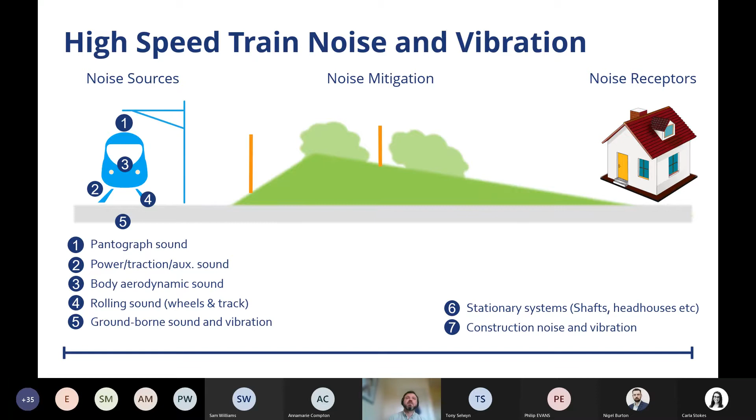So how did we end up with our commitments? Well, really, we need to go back to the noise policy statement for England in 2010. The vision of noise policy is to promote good health and a good quality of life through the effective management of noise within the government policy on sustainable development. And the noise policy has 3 key aims. That's to avoid significant adverse impacts of noise on health and quality of life, mitigate and minimise adverse impacts, and where possible, contribute to an improvement.

And the noise policy statement for England introduces the concept of effect levels, which are used by the WHO in toxicology, but we can also apply those to noise. The effect levels are the no observed effect level, so when noise is below this level, there's no detectable effect on health and quality of life due to the noise. The lowest observed adverse effect level, and when noise reaches this level, effects on health and quality of life can start to be detected. And finally, the significant observed adverse effect level. Above this level, we anticipate significant adverse effects on health and quality of life.

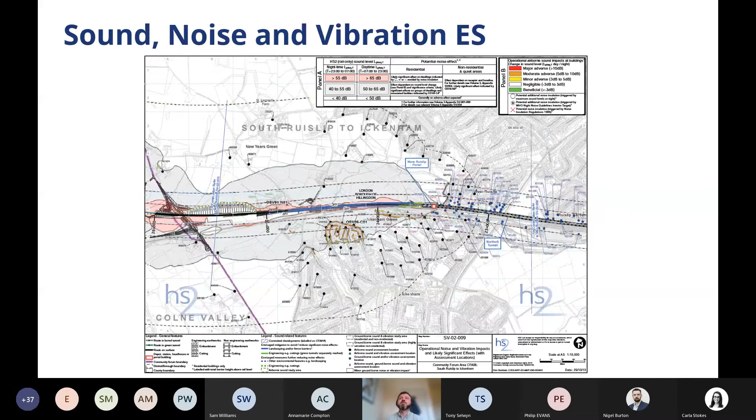So this led to a very particular way of presenting our environmental noise information in the environmental statement for phase 1. This noise map presents information that's compatible with the hierarchy. The grey noise contour on the screen shows the extent of noise exposure above the LOAEL. The red line shows the extent of noise exposure above the SOAEL, and we identify properties that are between these two levels. We identify whether they're impacted with a change of noise. And we also provided noise contours in bands so that a stakeholder could understand the level of exposure in their property.

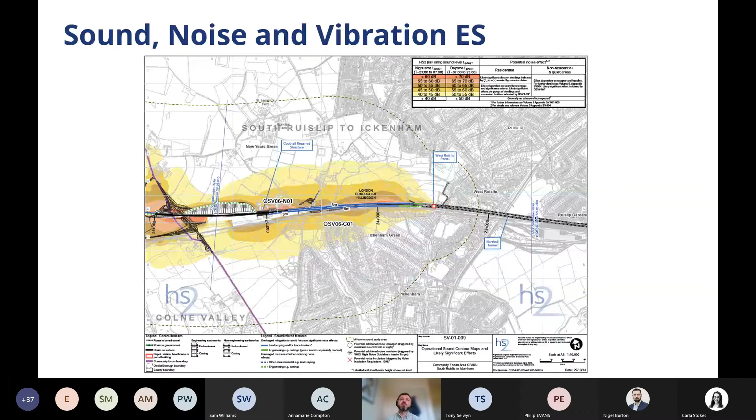So that was the environmental statement, and at hybrid bill stage we also submitted 4 key information papers which set out HS2's commitments, and each information paper refers to the key sources of noise that I've discussed: control of airborne noise, control of groundborne noise and vibration, control of noise from stationary systems, and finally our proposals for monitoring noise once the scheme is operational and the steps we'll take to rectify when noise doesn't meet our expected conditions. I've only got 10 more minutes or so, so I'll only be talking about E20 today, which is the control of airborne noise from the operational railway.

And incidentally, phase 2A of the scheme had a set of almost entirely equivalent information papers, and it's the intent to submit similar papers for phase 2B as well. So I won't go through the papers in detail. I'll just go through a total of about 7 paragraphs. I think the key ones are the objectives of information paper E20.

And so the first one is that the nominated undertaker, that's HS2, will take all reasonable steps to design and construct altered roads and to design, construct, operate and maintain the operational railway so that the combined airborne noise from these sources predicted in all reasonably foreseeable circumstances does not exceed the lowest observed adverse effect level. And that's the second aim of the noise policy statement for England.

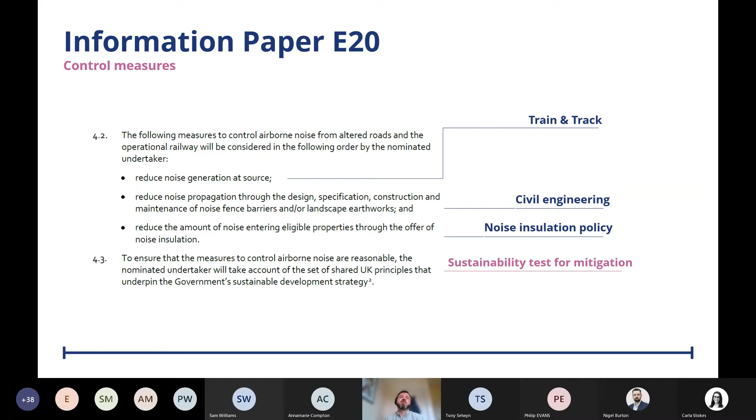And to ensure that the measures that control airborne noise are reasonable, we need to take account of the set of shared UK principles that underpin the government sustainability strategy. So that's really saying there has to be a sustainability test for mitigation. Most of the time we can always reduce noise further, but we need a way of demonstrating that the amount of noise mitigation we're providing is reasonable and doesn't cause other impacts or engineering issues or visual impacts, but I'll come back to that.

So in terms of responsibility in our control measures, the noise sources relating to the train and the track are to do with the rolling stock and our rail systems, and those are subject of design and specification, possibly the subject of another talk. And the noise mitigation is the responsibility of the civils contractors who are designing and building the railway. So the hybrid bill design for Phase 1 included more than 60 kilometres of noise barriers, in addition to earthworks to reduce noise. And currently our civils contractors are optimising that design in line with the commitments that I've described.

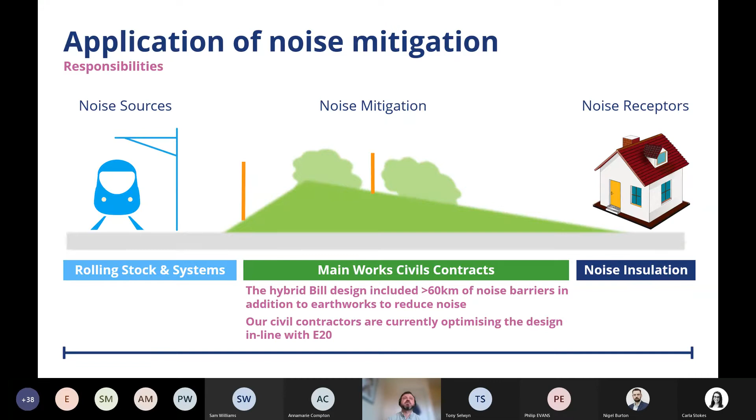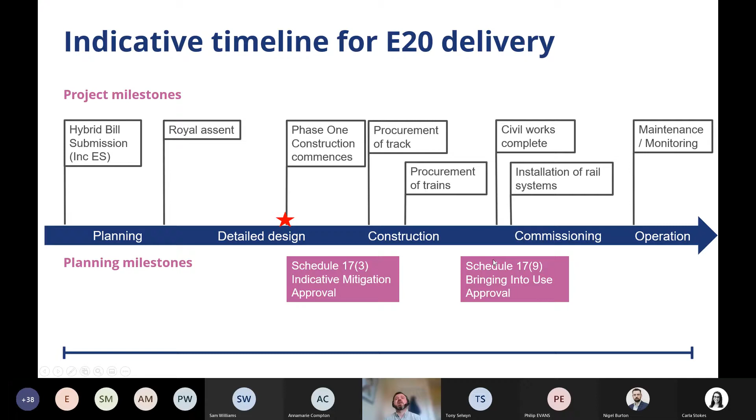Key to today's presentation are some planning milestones, and we refer to that as Schedule 17 of the High Speed 2 Act. And we're currently in this stage here, which I'll talk more about in a second, and we're at the Schedule 17 paragraph 3 approval stage for indicative mitigation. And later on, we have another approval stage called bringing into use.

So I think now is a good time to move on to a case study. What do we actually mean by a Schedule 17.3 application? Well, the HS2 Act for Phase 1 granted us deemed planning permission for Phase 1 of the railway under Part 3 of the Town and Country Planning Act, but some detailed design and construction aspects are subject to further approvals. And Schedule 17 of the Act puts in place a process for the approval of certain matters relating to the design and construction of the railway with the relevant local planning authorities. It's not a planning application because we already have deemed planning permission, but in practical terms, it's treated like that.

So Schedule 17 sets out a number of items subject to approvals, and that's plans and specifications, which are relevant to us. And paragraph 3 talks about indicative mitigation. So that's not just noise mitigation, that can be ecological mitigation and other types of mitigation. And again, we need to provide information at bringing into use. And through the best practice that we've set up through the planning memorandum, which forms part of our commitments, we're committed to providing information on noise at these 2 stages during the Schedule 17 process. And we're required to show that we are reducing noise as far as reasonably practicable at these stages.

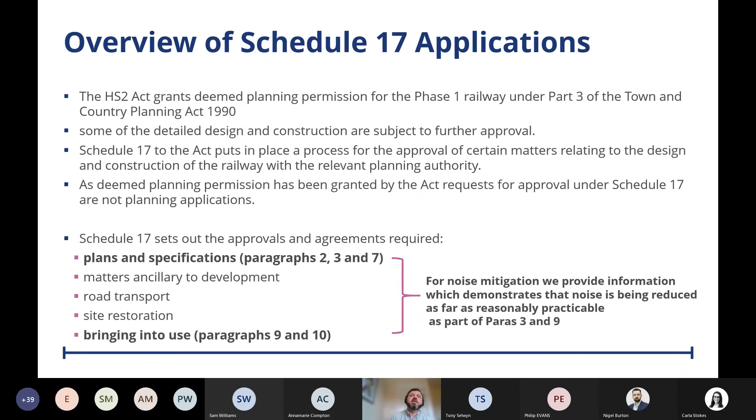So it's actually quite a key stage for us at the moment. Our stakeholders are very interested to know how we're performing. It's been many years now since we've provided updated noise predictions to those presented in the environmental statements. So we're being watched very closely now, and so it's quite an exciting time. The application I want to talk to you about is actually the first approved Schedule 17 application which includes noise mitigation.

So it refers to West Ruislip portal, which is actually hopefully familiar from the first noise map that I showed you. But for the purposes of Schedule 17, the railway is divided into multiple assets, and a Schedule 17 application is made on an asset by asset basis or for a group of assets.

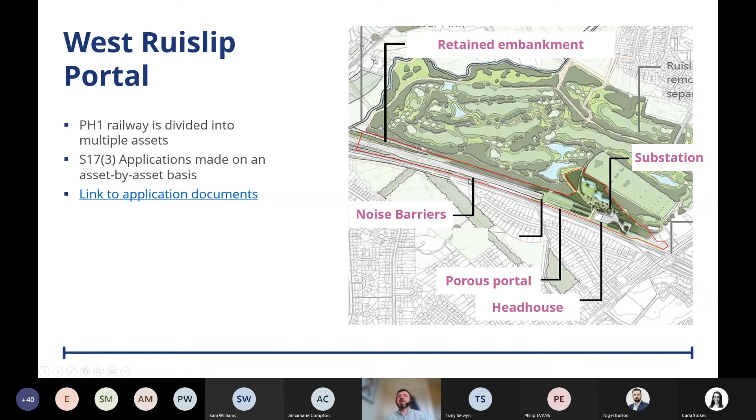And so West Ruislip portal included embankment works, a porous portal on the entrance to the London tunnels, a head house and a substation. But I think most important for today's presentation, it included an application for noise barriers.

So where were we at the end of the hybrid bill? So this picture here just shows you an extract from one of the additional provision environmental statements. So in West Ruislip, we had predicted that 156 dwellings would exceed the lowest observed adverse effect level, and we predicted minor and moderate noise impacts. This is an increase in noise compared to the existing noise level at approximately 70 dwellings.

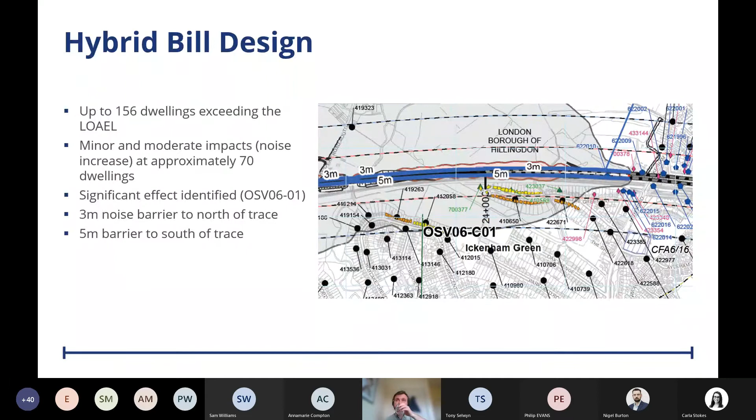And because of this, we'd identified a significant community effect in the community just to the south of the railway. And so the environmental statement included a 3-metre noise barrier to the north of the trace and a 5-metre noise barrier to the south of the trace. And the noise impacts I'm describing there were the residual impacts after the provision of that mitigation.

So in Schedule 17 design, our main works civils contractors have the opportunity to optimise. So they're using noise prediction to test the performance of their designs, and during their Schedule 17 application, they're aiming to demonstrate that the design reduces noise as far as reasonably practicable, using both acoustic and non-acoustic factors. And these were all the parameters that were agreed with the planning forum subgroup, which has representatives from local authorities across the route.

And so these factors are the acoustic performance of the railway, so how much noise is being made, value for money. So this is the comparison of the health and environmental benefits of the noise reduction with the whole life cost of the mitigation. So as you'll see in a second, the government has tools for monetising noise impact, and we need to compare the cost of the mitigation to the reduction in noise impact that mitigation provides.

So operational or engineering practicability. Is it safe to build a tall barrier on top of a tall embankment? Because we can always provide more mitigation, but there'll come a point where it's no longer practicable to do so. Impacts on other environmental disciplines. The key one is the visual impact of a tall noise barrier.

So this slide here just shows a summary of the optioneering that went into the Schedule 17 application. And in this case, the contractor assessed 12 different noise barrier designs and compared the acoustic performance, the visual impact, the value for money, and the engineering practicability, and they came up with their preferred design. So a number of things were tested. This site didn't lend itself to earthworks because it was quite a narrow rail corridor. Earthworks would have needed more land.

So generally this site focused just on noise barriers, but they tested different heights, moving barriers close to the railway, further from the railway, and cranking noise barriers, which I'll talk about in a second.

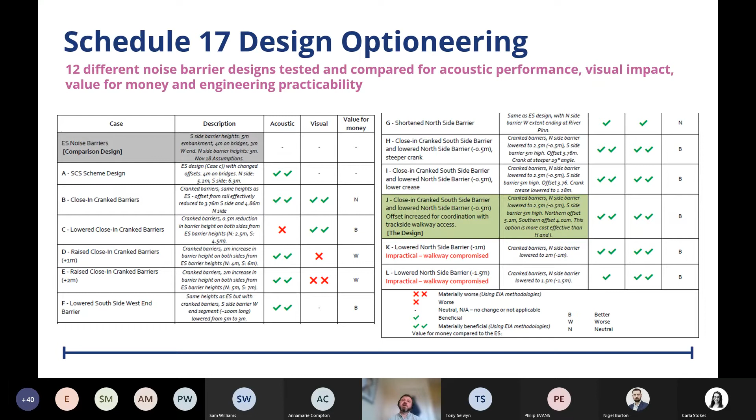And just a little bit on value for money. How do we determine if noise mitigation is value for money? Well, we use the government's transport analysis guidance tool, often referred to as WebTAG, and this provides us a means of monetising the impact of noise based on the most up-to-date dose response relationships for the different outcomes or health impacts of noise.

And so really for every noise mitigation measure, we can come up with a cost benefit ratio which compares the monetised impact of the noise without mitigation with the impact with mitigation, divided by the whole life cost of the mitigation. So a cost benefit ratio of 1 tells us that the inclusion of that mitigation is exactly offsetting the health disbenefits created by the noise.

So at this design, the contractor came up with what they termed a cranked noise barrier design. So this actually helps to improve the acoustic performance of the noise barrier because it moves the top of the barrier close to the railway, and also visual impact was a key concern in this area because this barrier could be seen. So the crank of the barrier helps soften the visual appearance of the barrier.

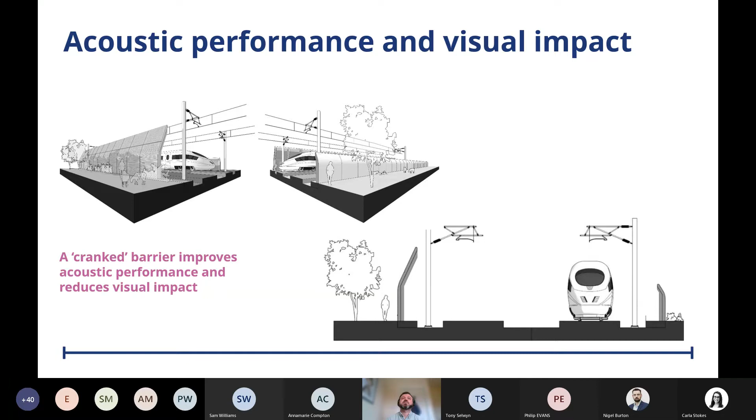And just a plan showing one of the plan drawings and some more sections that are included in the Schedule 17 application.

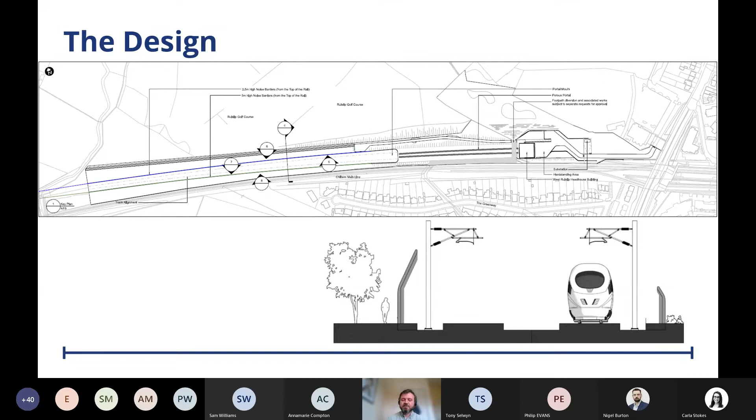And finally, noise information that we provide with each Schedule 17 application. The noise report that we provide does give more detailed noise predictions, but also gives a summary of the overall performance. And so it was concluded that this design actually represented a material improvement compared to the hybrid bill, because if we look at the number of properties exposed to the lowest observed adverse effect level for the proposed design and the environmental statement, we can see both during the day and night the numbers have reduced compared to the design.

And in terms of the impact, so this is the change in noise, we've also reduced the noise change in the communities in the vicinity of the railway. And if we were to go and assess the area again using the environmental assessment methodologies, we would say this is a material improvement in the situation that was presented at hybrid bill. So this is good news. So that's it about the design.

Just one last slide on what's the next steps. Well, as I said, we've only had 1 or 2 Schedule 17 applications submitted and approved. So we're continuing to design the railway and optimize the design to reduce noise. We still need to confirm the performance of the rolling stock and specify, procure and install the track to minimize noise. And eventually we need to implement our strategy for monitoring the acoustic performance of the railway.

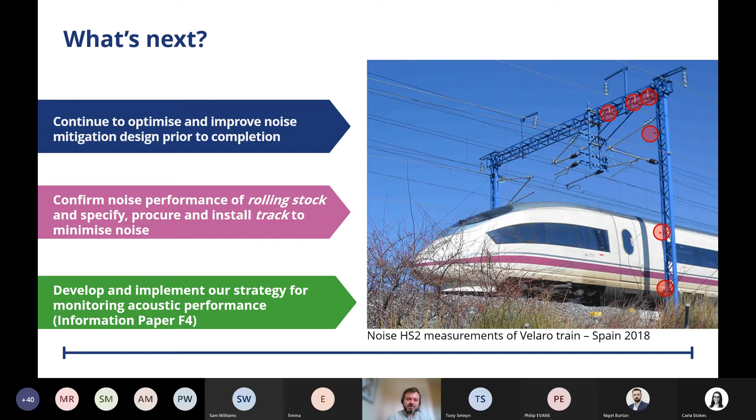While Carla gets the slides back up for the next presentation, which is by Stephanie Murphy and John Fisk. So Steph has been working in ecology for 18 years and has a PhD in bat acoustics. She's been involved on HS2 for 9 years on the design, coordination and survey to inform the hybrid bill, and is the lead technical advisor for the Bernwood monitoring programme and the Natural England named ecologist for the Bernwood bat licence. Steph is experienced in ecological impact assessment for linear infrastructure, specifically road and rail, and experienced in designing mitigation and compensation for protected species with a specialism in Annex 2 bat species.

John has been working in acoustics for around 14 years and has been involved on route appraisal, optioneering, EIA and public consultation for HS2 for the last 10 years. He's experienced in environmental impact and noise modelling and assessment of road and rail traffic noise, mechanical plant noise sources, construction noise, and other industrial noise sources. Steph and John are Executive Director and Associate Director, respectively, at the Temple Group, and will be telling us about the innovative work on how acoustic deterrents can be used to deter bats from infrastructure while ensuring normal levels of bat behaviour in the vicinity remain the same. Over to you, Steph and John.

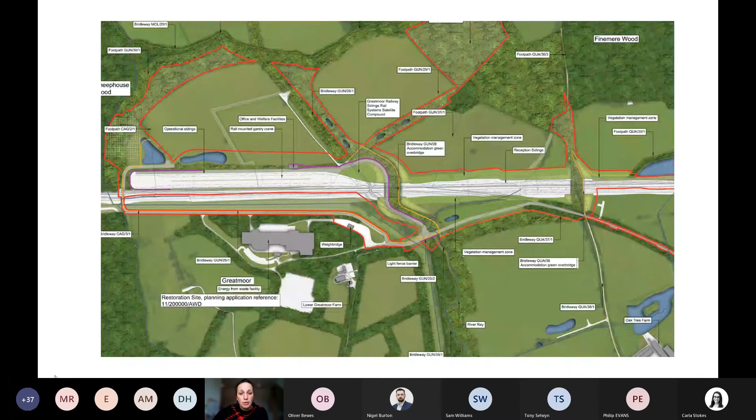Now, a particularly challenging area within the Bernwood licence was the Sheephouse Wood area. So there's the Sheephouse Wood. It's essentially adjacent to the FCC landfill. And this is the sketch of it looking east. So there's a big SSSI woodland, which has got Bechstein's colonies. And our baseline data showed that bats were exiting the woodland to access habitats to the west of the rail corridor.

And the proposal for the restoration of the FCC landfill was to replant this woodland over time. So essentially you will have a big ancient woodland and in 50, 100 years a new woodland adjacent to that. So we would like to think that bats will continue to want to access the land to the west, but if it's bisected by trains running at 360 kilometres an hour, it presents a significant collision risk. The area is very complex, so it's an ancient woodland, a site of special scientific interest. It's an active landfill, and the Network Rail tracks, the challenges are very complex.

So in order to prevent collision risk, a bespoke 850-metre bat mitigation structure alongside Sheephouse Wood is being proposed to protect bats from being struck by passing trains. But there was still an outstanding concern that at each of the entrances to the tunnel portals, at the base of the structure, where bats could enter or exit the structure, they're still at a risk of collision.

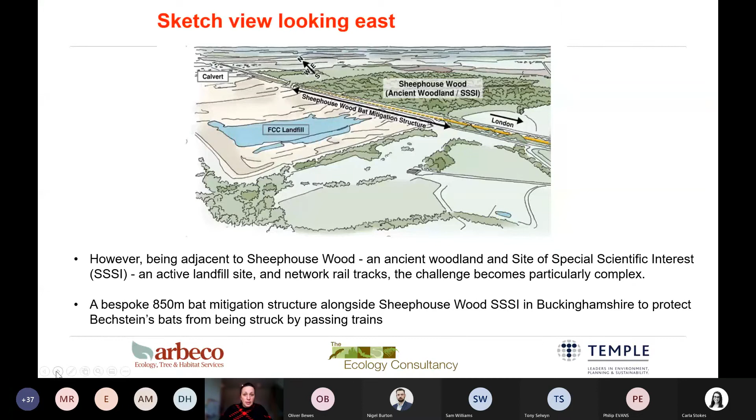But one of the areas that we looked at in particular was the use of acoustics and how we can use acoustic ultrasound to deter bats from crossing the railway at unsafe crossing points. So I'm going to go to the next slide, please. So I'm going to pass over now to John Fisk, who will discuss in detail what is an acoustic deterrent, and then we'll continue on to discuss the propagation and directivity of the deterrents. Thank you.

Hi there. Good morning. Thanks, Steph. So yeah, what is an acoustic deterrent?

So I can hear an echo. Thanks.

Yeah, so bats produce high frequency vocal signals, perceive their surroundings by listening to echoes reflected from targets in their path. I'm sure lots of people are aware of their use of echolocation, things like this. So they rely on that heavily for orientation, prey capture, communication, and obstacle avoidance.

So the acoustic deterrent, as Steph said, is basically an array of transducers or speakers that generate noise over the frequency range of, it says, 10 kilohertz to 100 kilohertz, but basically in the ultrasound frequency range. For those that don't know, the ultrasound frequency range is basically anything higher frequency than a person might be able to hear, so anything higher than about 20 kilohertz or so.

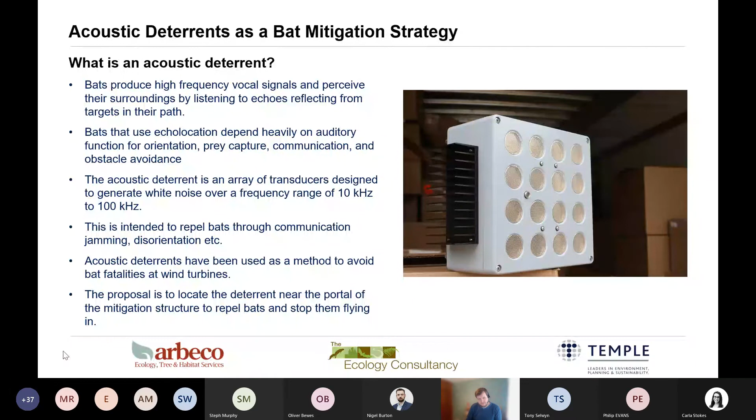Thank you. So there were field tests undertaken. There's basically two main purposes, or two strands of the field tests. I'm going to talk about one of them. The first one, which I won't talk about, which Steph will know more about, is looking at how effective the deterrent is at its main purpose, deterring bats. But what we also looked at is the properties of the deterrent in terms of how it emits the ultrasound and how that propagates over distance and directionally as well.

And the main reason for this is effectively as it says there. So the effectiveness of the ultrasound deterrent is going to be limited by the distance and area the ultrasound can be broadcast into, and things like high humidity, potentially temperature, can affect quite strongly how these very high frequency sounds are actually emitted.

So effectively, if the ultrasound is not emitted particularly strongly, or can't be heard by the bats until they're very close to the unit, then it may affect the effectiveness of the deterrent in general. And it may also mean that you may need an array of units or a different setup to actually deter across a full area of a portal and things.

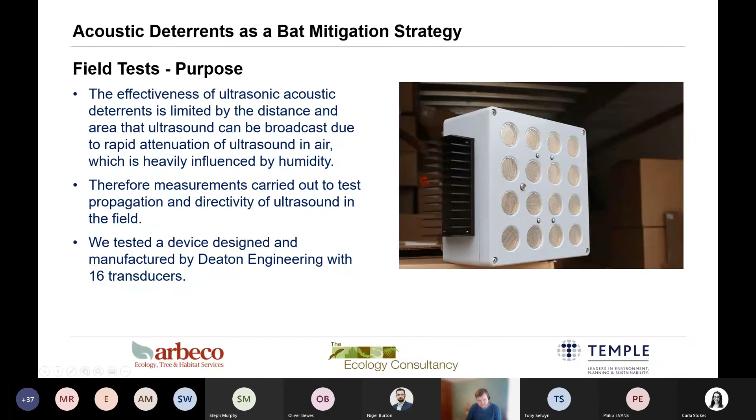And yeah, so we undertook measurements with a sound level meter. It was a slightly specialized sound level meter, not your standard one, with capability of measurements up to around 80 kilohertz. Although when it gets close to that high frequency, the background noise makes some of those measurements, particularly at high frequencies, a bit difficult.

Measurements were made at various distances from the unit: 1 meter, 5 meters, 10 meters, 25, 50, 75, and 100. And also we orientated the unit at different angles to try and look at the directivity, how the ultrasound spreads side to side from the unit, basically. And it's a symmetrical thing, so it's expected that the directivity up and down would be the same as side to side.

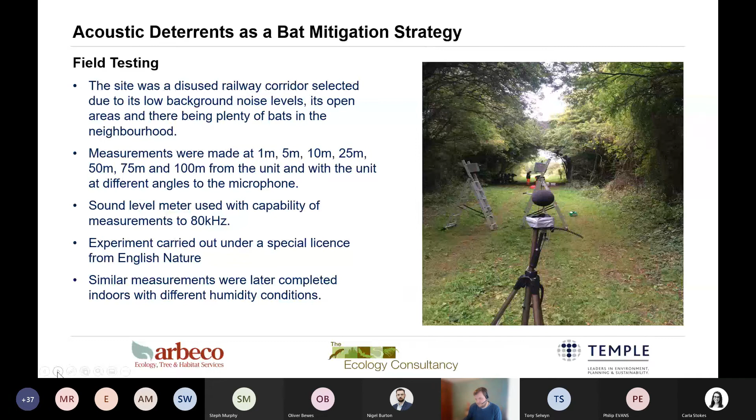And similar measurements. We also repeated some measurements in an indoor location with effectively different humidity conditions, just to understand some of the really close-up propagation of the unit in different conditions. So on to the next slide, we've got some results of that testing.

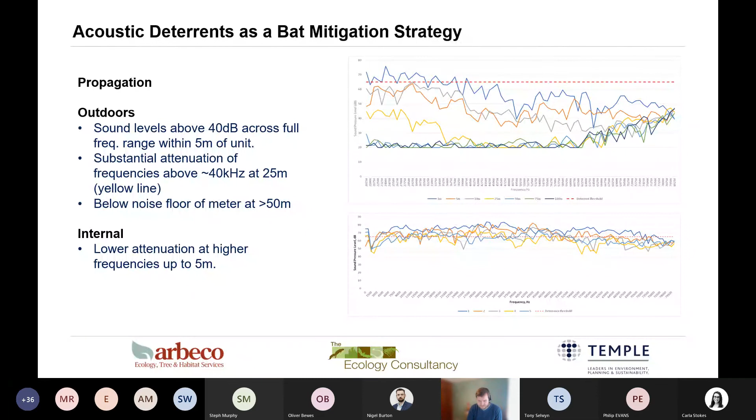And then the internal ones on the right were all done at much closer distances. It's the same thing on the graph, but the distances are 1, 2, 3, 4, and 5 meters instead. The ultrasound actually varies quite a bit over time, hence why they're quite similar. But it just showed that in different conditions, the higher frequencies can propagate better, and effectively it's much higher relative humidity on the outdoor measurements. So should we go to the next slide, please?

And this was just looking at the directivity of the deterrents. The graph on the right is basically just looking at the angle of incidence of the unit. Effectively, the front of the unit, 0 degrees, is at the top. And then as you go around, we did measurements at 10 degrees, 20, 30, 45, etc. So, highly directional, a reduction of about 15 to 20 dBs at the 10 degree angle, so quite significant directionality there.

Similar results shown in the internal and outdoor measurements, but obviously the internal ones are a little bit easier to measure because, as I showed before, we got higher sound levels from the unit at distance. So this was the last slide I've got in terms of the results. Basically, the work is still in progress on this, so we're just sharing some of the stuff that we've done so far.

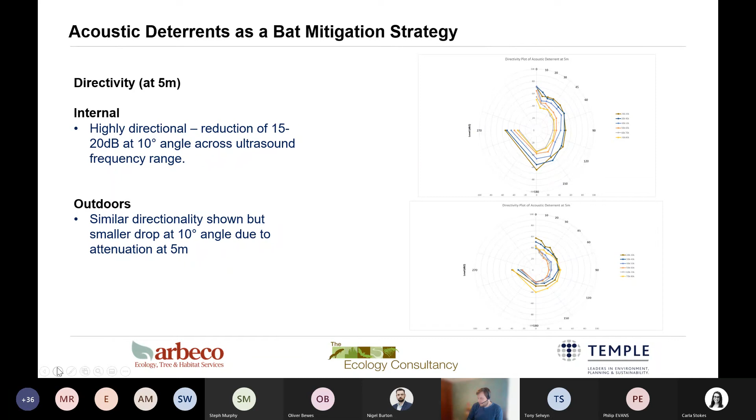Steph may also, if people are interested, be able to talk about how effective the deterrent was in the field trials, but basically the information we've gathered is useful for understanding things like how many units we might need to use to get coverage, and also to look at the effectiveness of the unit, how much it was deterring bats and at what distance, and then compare that to what sound propagation characteristics there were at the time. So I think that's my last slide. You can carry on and go to the next slide.

Thank you for that. Hand over to Nigel. Yes. Thanks, Steph and John. Got a little bit of time for questions. Got a couple of questions that have come up in the chat. First one was from Martin Chan: is this ultrasonic deterrent device to be turned on at all times? So that's one for you, Steph or John.

Well, they'd only need to be turned on at night time and during the active bat season, and at times when it's critical. That time changes throughout the season. In the peak of the summer months in June, it'd be from 9 at night till 4 or 5 in the morning, but at other times in the year it would need to go on longer, October, November. And bats are very temperature dependent in their activity, so in the cold weather we've had over the last few weeks, they wouldn't be moving around significantly, so the chance of collision risk is significantly reduced.

But as the temperatures start to warm up and bats start to move around and leave their hibernation sites and start to use their breeding sites, the deterrents, if there's a collision risk in an area that we know is frequently used by bats, they'd have to be on at night in those areas. But the audible sound that we as humans hear is quite contained. It's almost like a whooshing noise, but it's not. It does dissipate fairly quickly at the level we can hear it at.